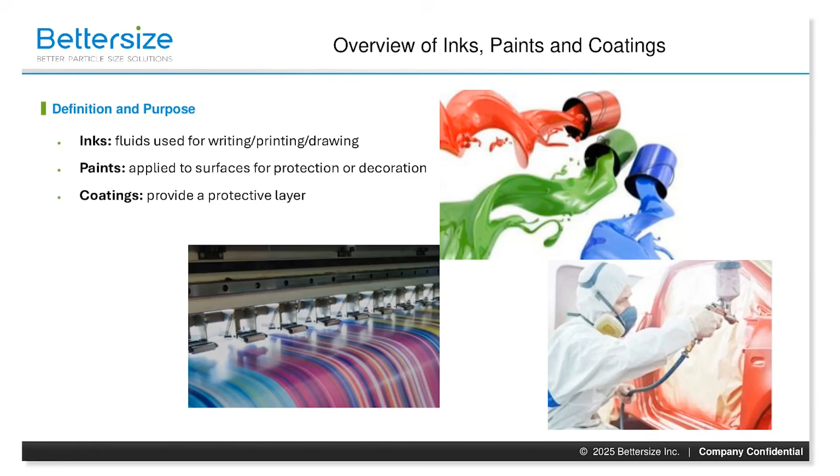And coatings are similar to paints, but are often designed for specific functional purposes beyond just appearance. They can provide protective, decorative, or functional properties to a surface, and are comprised of pigments, binders, solvents, additives, and fillers. These can include varnishes, lacquers, enamels, and other specialized formulations in industries such as automotive, aerospace, and construction.

So what do inks, paints, and coatings all have in common? They share the primary purpose of imparting color, protection, and specific functional properties to surfaces. They are comprised of similar fundamental components. Functionally, these materials rely on the effective dispersion of pigments to achieve uniform color and performance, and they often require stability to prevent settling, agglomeration, and other issues.

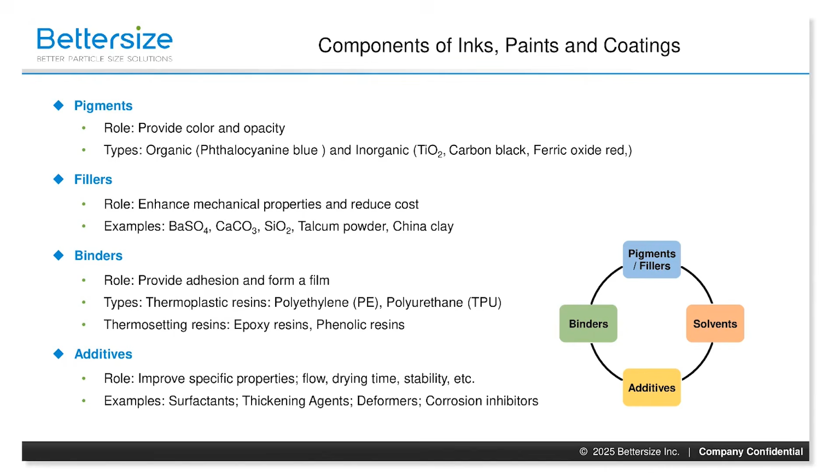Pigment is a material that exhibits a specific color because it selectively absorbs certain wavelengths of light. While many materials possess this property, pigments are stable at normal temperatures and have a high tinting strength, so only a small amount of it is needed to see the color when it's used on objects or mixed with a carrier. Many of the critical properties of inks, paints, and coatings, such as their color strength, covering ability, surface finish, and durability, are determined by the sizes and shapes of the dispersed pigment particles.

So let's quickly review some definitions. What's a particle? A particle is a small unit of matter with defined physical properties such as mass, volume, and shape. Particles can widely vary in size and composition, ranging from subatomic particles like electrons and protons to larger particles like grains of sand.

In the context of materials like inks, paints, and coatings, particles typically refer to the smaller solid components, such as pigments and fillers, that are dispersed within a liquid or solid medium to impart specific properties to the final product. And typical materials would include things like carbon black, titanium dioxide, organic and inorganic pigments.

Now that we've defined what a particle is, here are some key particle parameters to consider. Particle size refers to a single value representing the measurement of the size of the diameter of an individual particle, while particle size distribution describes the proportion of particles of different sizes within a sample, not just the size of a single particle. This is often shown as a graphical representation. It provides information about the range, the ratio, and the distribution pattern of particle sizes across the sample.

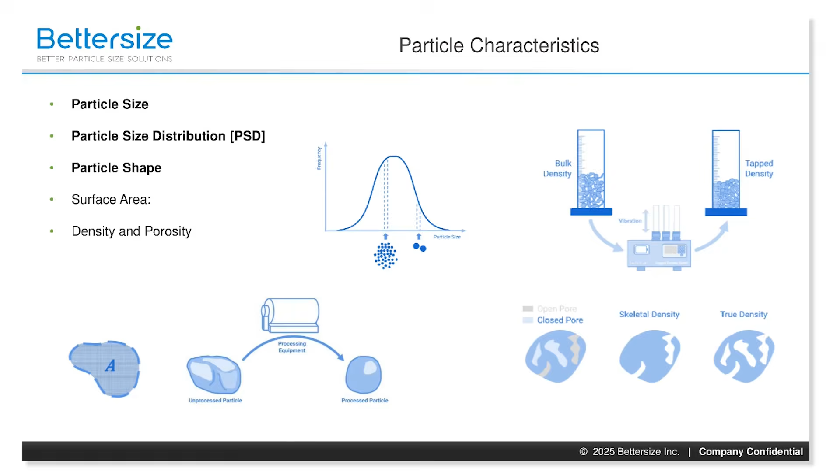I want to focus on particle size and the corresponding particle size distribution and particle shape, and their role in influencing pigment dispersion. Smaller particles are better dispersed and able to disperse more uniformly. And this can lead to even coverage. Irregularly shaped particles have larger surface area, which can enhance dispersion and stability. However, this can also lead to increased viscosity and potential settling.

If we move on to particle size influence on hiding power, opacity equals hiding power. So basically, it's covering ability. Smaller particles have a larger surface area to volume ratio, as I've mentioned, and this allows them to scatter light more effectively. This increased scattering enhances the hiding power of the coating, making it more effective at covering the surface. Particle size distribution: with a well optimized distribution, you can get a mix of larger and smaller particles, and this can improve hiding power by maximizing light scatter and filling gaps in the coating.

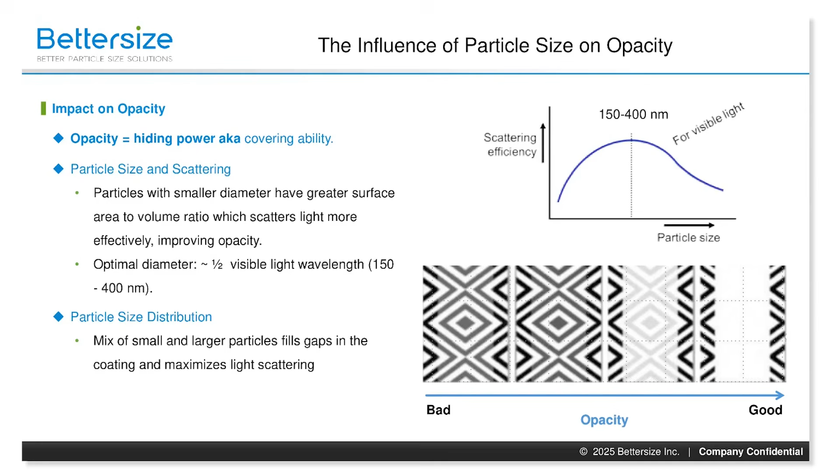So, in summary, smaller particles generally enhance the hiding power of the coatings by scattering more light more effectively, while larger particles contribute less to the opacity. But optimizing the particle size distribution is key to achieving the desired level of hiding power within these materials of inks, paints, and coatings.

Moving on to the size and shape effects on the optical properties. Two phenomena govern both hiding power and the color strength of inks, paints, and coatings: light absorption and light scattering of the pigment particles that are within the material. Color strength refers to the intensity of color a pigment can impart to a material, which is directly related to the size of its particles.

Well-dispersed fine particles provide better color consistency and hiding power, resulting in vibrant color appearance, compared to larger, poorly dispersed particles, which tend to scatter light less effectively, resulting in a weaker color strength, leading to a more muted or dull appearance. Particle shape: spherical particles can provide a smooth and uniform dispersion, which helps in achieving consistent color strength. Irregular shaped particles can scatter light in multiple directions, which can actually enhance the color strength.

So, an ideal distribution is a well-balanced distribution of particle size and shapes, which can enhance color strength by maximizing light absorption and scattering and result in more vibrant and intense colors. Particle size analyzers like laser diffraction can be used to measure the particle size distribution of a pigment, which can then be correlated to its color strength.

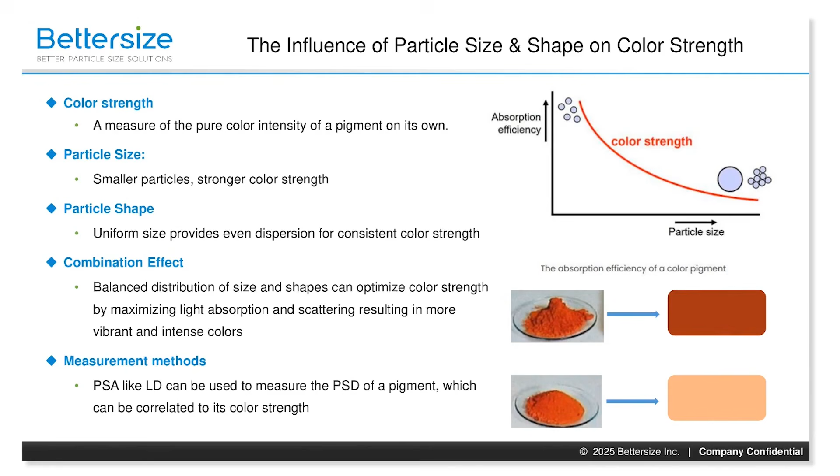Particle size and shape impact other characteristics of these materials. There's viscosity, where smaller particles and their higher surface area increase the viscosity of the formulation, which affects the ease of application and leveling. However, irregular shapes can increase interactions with the surrounding fluid, and this can also lead to higher viscosity.

In terms of mechanical properties, smaller particles enhance smoothness and durability. However, irregular shapes can improve mechanical interlocking, enhancing properties like adhesion and scratch resistance. In terms of durability, smaller particles fill voids effectively, creating denser and more durable materials. But irregular shapes can enhance wear resistance and withstand mechanical stresses.

And in terms of weathering, smaller particles provide better coverage and protection against environmental factors. However, irregular shapes can enhance protection against moisture and UV radiation. In summary, both particle size and shape are critical factors that influence the dispersion, stability, hiding power, mechanical properties, and final appearance of inks, paints, and coatings. Proper optimization of these factors is essential for achieving high performance formulations.

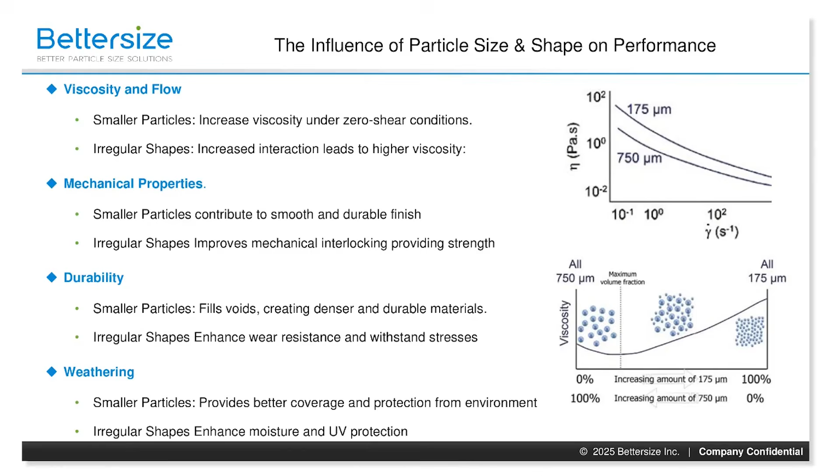So next, I want to discuss the importance of stability and zeta potential. And of course, what is zeta potential? Zeta potential is not a property of the particle, but of the system, comprised of the particle and the dispersion medium. Zeta potential is a measure of the electrical potential at the slipping plane of the particle in the medium. It indicates the degree of electrostatic repulsion or attraction between the particles.

High zeta potential means strong repulsion between particles, like common magnetic poles, which helps prevent agglomeration and ensures stable dispersion. It's a critical parameter for understanding and controlling the stability of colloidal suspensions, such as those found in inks, paints, and coatings. There are many factors that affect zeta potential, including pH of the suspension, the ionic strength of the solution, the type of electrolyte ions, the temperature, which can affect the viscosity and dielectric constant of the medium, as well as the diffusion and mobility of the ions in the suspension.

Particle concentration can lead to particle-particle interactions, which can affect the overall zeta potential. Presence of surfactants, polymers, solvent properties, and surface modification of the particle with coating or functionalization can alter the surface charge and thus the zeta potential.

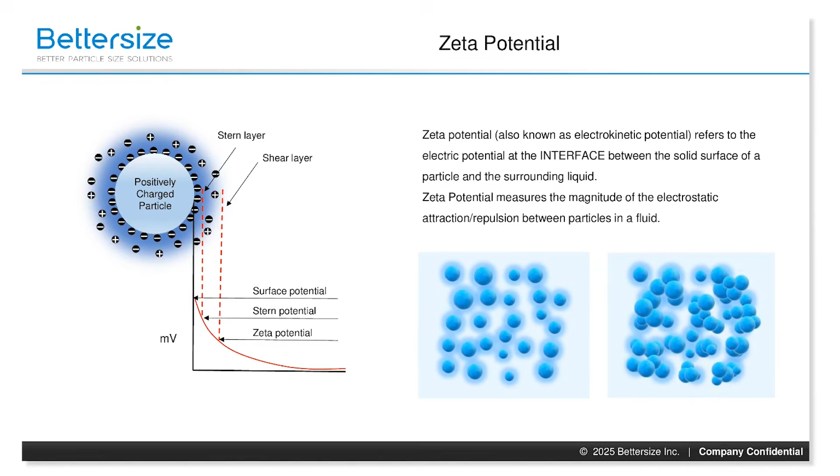So what is the importance of zeta potential? Having high zeta potential controls particle stability. High zeta potential, either positive or negative, creates strong electrostatic repulsion between the particles. This repulsion avoids clumping and aggregation and prevents particles from coming together, forming a stable suspension. Maintaining the high zeta potential ensures that particles remain evenly dispersed in the medium, preventing them from settling. It maintains that uniformity.

Electrostatic stability involves maintaining the forces that keep the particles apart, and this will prevent them from settling at the bottom of the container. By adjusting pH and conductivity, manufacturers can achieve the optimal zeta potential for stable dispersions. Dispersing agents such as surfactants and stabilizers can be added to formulations to improve the electrostatic or steric repulsion between the forces, and this further enhances stability and prevents aggregation.

Ensuring consistent and reliable formulations is dependent upon preventing settling, agglomeration, and flocculation. So manufacturers can ensure that they don't settle, aggregate, or flocculate, and maintain the properties throughout storage and application. Proper control of zeta potential and stability ensures that each batch of product has the same uniformity, performance, and quality, minimizing variations and defects.

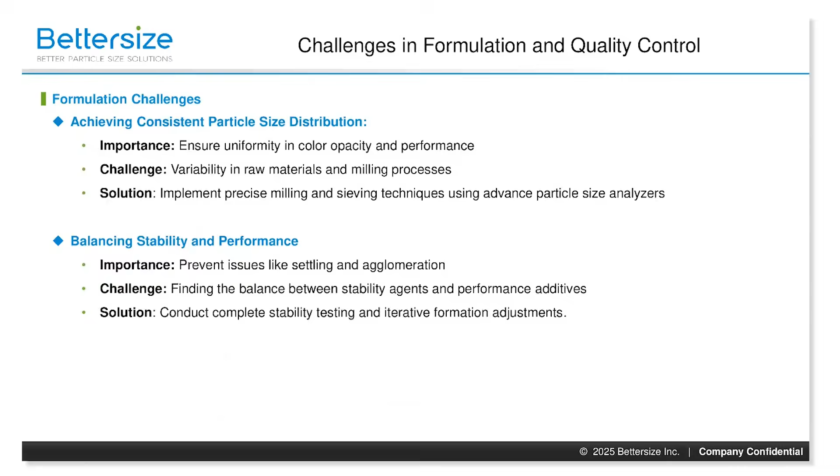In terms of processing issues, the goal is to prevent sedimentation and caking. This will ensure long shelf life and uniform application. Because the challenge is that particles can settle over time, leading to a separation of the components. And high viscosity formulations may be prone to caking, forming hard lumps, and are difficult to redisperse. So solutions include using thickeners and stabilizers to maintain the suspension and prevent sedimentation. Controlling viscosity ensures a smooth flowing consistency, and optimizing storage conditions such as temperature and humidity reduces the risk of caking.

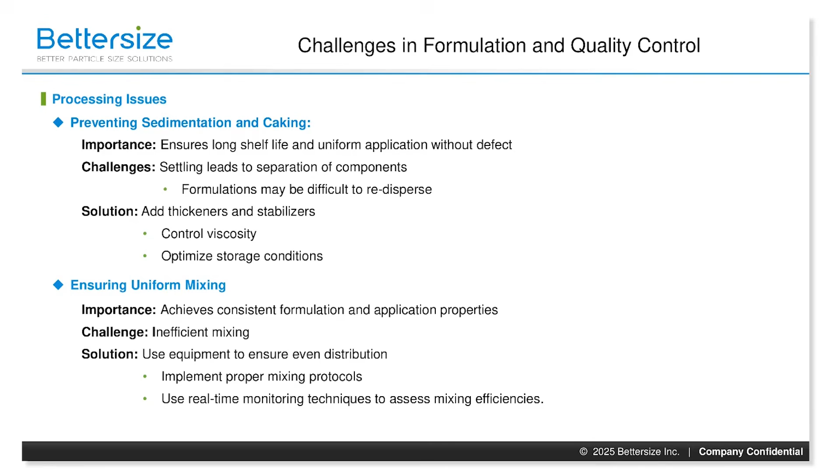Another processing challenge is to ensure uniform mixing. It's important that we achieve consistent formulation and application properties to know that all components are evenly distributed. Inefficient mixing can lead to uneven distribution of the pigments, binders, and additives, and this will affect color and performance. This is especially important in large batches, as this may present difficulties in achieving thorough mixing. Solutions include mechanical mixers to break up the clumps and ensure even distribution. Using real-time monitoring techniques to assess mixing efficiency is important, and you can adjust the parameters as needed.

In terms of quality control, the goal here is to maintain batch-to-batch consistency to ensure product reliability and customer satisfaction. Challenges, of course, arise from the variability in raw materials and process conditions, which can lead to differences in color, viscosity, and performance. Solutions include implementing strict quality control measures, including incoming raw material inspection and testing, developing and adhering to SOPs for production processes, and performing regular calibration and maintenance of equipment to ensure accuracy and reliability.

If we address environmental factors in order to maintain product performance under varying conditions, which include temperature, humidity, and exposure to light. The environmental factors can cause degradation of pigments, binders, and additives, which leads to changes in color, stability, and performance. Solutions include conducting environmental testing to assess the impact of these different conditions on the product stability and performance, and as a result, using robust formulation additives that are resistant to these environmental factors, and optimizing packaging to protect the products from external influences.

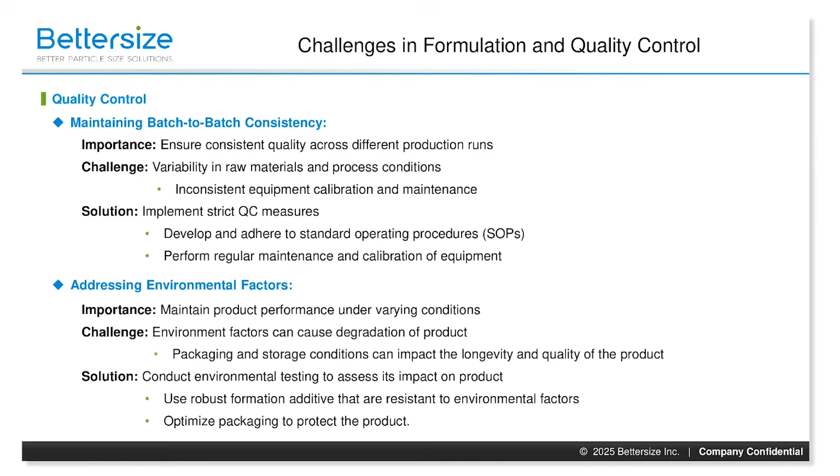A solution to address the challenges in formulations and in quality control is to employ advanced characterization techniques. This provides detailed insights into particle properties and formulation performance, enabling precise control and optimization. Examples include laser diffraction, which measures particle size distribution, ensuring uniformity and consistency. Dynamic light scattering analyzes particle size and distribution in colloidal systems. Zeta potential measurement assesses the electrostatic stability of particles, preventing aggregation.

Rheology analysis evaluates the flow behavior of formulations, optimizing viscosity and application properties. Electron microscopy provides information on particle size, morphology, and surface topography. Static multiple light scattering characterizes the stability of dispersions. Image analysis provides particle size, shape, and distribution information. And BET, Brunauer, Emmett, Teller, provides information about the particle size and porosity of a material.

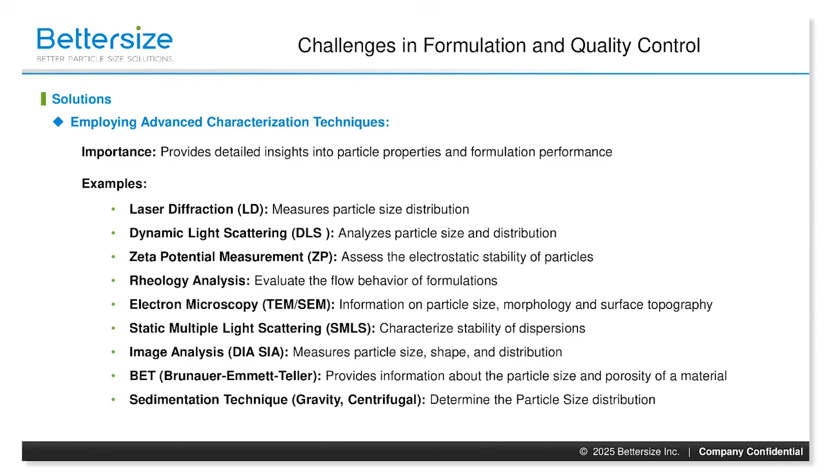Solutions to common challenges include optimizing formulation parameters. The importance of this is that it enhances product performance and consistency by fine-tuning the composition and processing conditions. One example would be to adjust the pH, which as we have mentioned ensures optimal zeta potential and resulting stability. And this prevents issues like agglomeration and sedimentation. Selecting the appropriate stabilizers can enhance the dispersion and prevent aggregation.

And fine-tuning the additive concentrations will balance performance and stability without compromising either aspect. So ensuring the right balance of these additives to achieve desired properties will add to the durability, gloss, and adhesion of these materials.

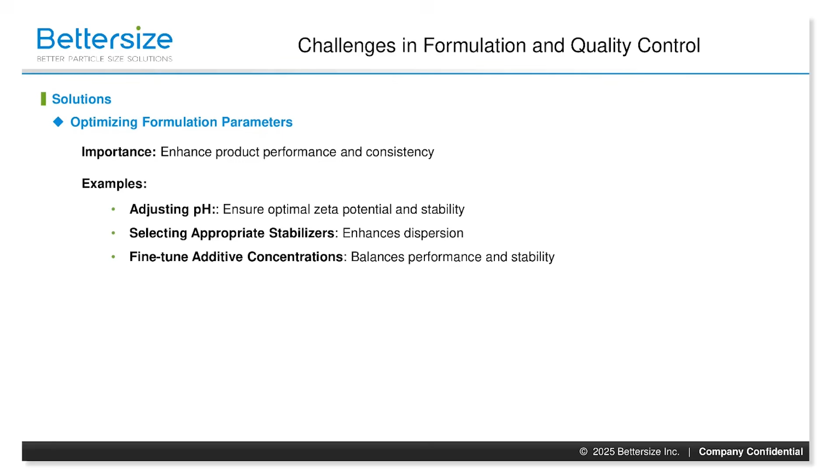So as we wrap up part one, let's highlight the critical aspects that impact the performance and quality of inks, paints, and coatings: the importance of particle size and shape, the role of zeta potential and stability, and the common challenges and solutions in formulation and quality control. And I hope that I've helped you understand the whys of the importance of particle characterization, and how to enhance and improve these products through particle analysis. Now I'll hand this over to my partner, Weichen, to explain how you can use particle size distribution, zeta potential, and stability analysis with some interesting case studies in part two of this presentation.

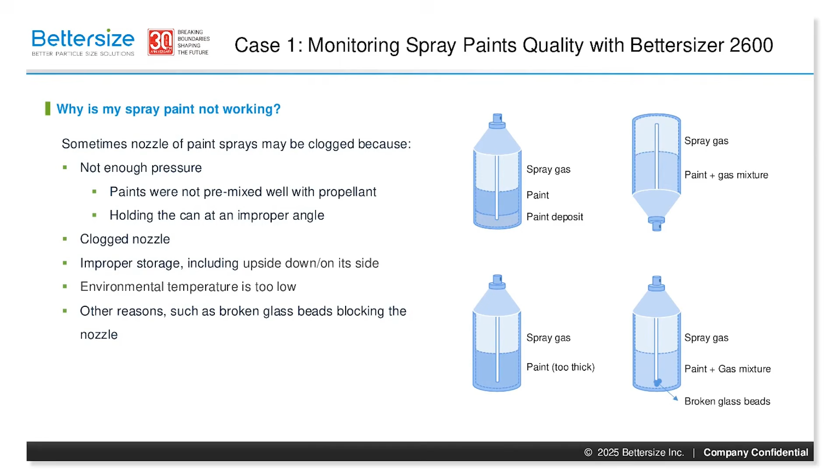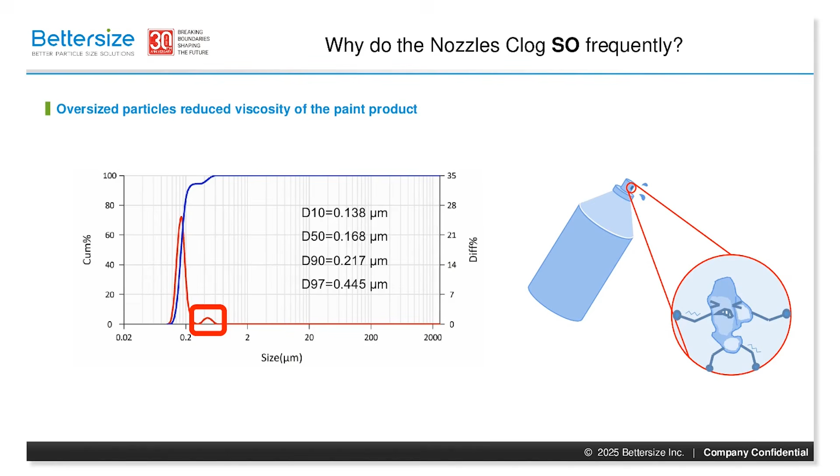The animation on the right shows how agglomerates clog nozzles, leading to spray paint failure. The Bettersizer 2600 helped this paint provider identify and quantify these oversized particles, allowing them to adjust their process and solve the problem with an optimized grinding setup and finer filtration.

Now, let's talk about the Bettersizer 2600 laser diffraction particle size analyzer itself. Its tagline, "Better particle sizing for every need," really sums it up. This award-winning instrument, recognized with the 2024 i-NOVO Award, offers unparalleled measurement capabilities with its modular design, from paint suspensions to pigment dry powders. With its unique optical design, the Bettersizer 2600 boasts an exceptionally wide particle size range, handling everything from 0.02 to 2,600 microns with wet dispersion and 0.1 to 2,600 microns with dry dispersion.

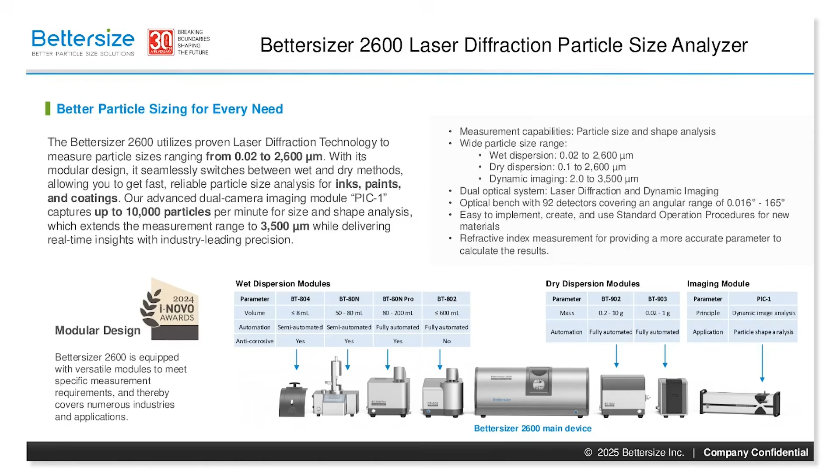Beyond size, the Bettersizer 2600 also measures particle shape, another crucial factor, thanks to the powerful image analysis module. For even larger particles, its dynamic imaging capability covers 2 to 3,500 microns. This versatility is achieved through its unique combination of laser diffraction for rapid size analysis and dynamic imaging for detailed shape information.

As a summary, let's talk about how we can measure particle size to optimize quality inspection. Traditional methods like sieving and filtering have long been an important part of paint production processes. Sieving physically separates particles, which is essential. However, it presents some challenges, especially when dealing with fine particles around 40 microns and below, due to issues like mesh size limitations and particle agglomeration. It can be difficult to handle these fine materials effectively, and the resolution and accuracy of sieving can be limited. While sieving provides a systematic and reliable process, the results themselves can lack the precision needed for modern formulations.

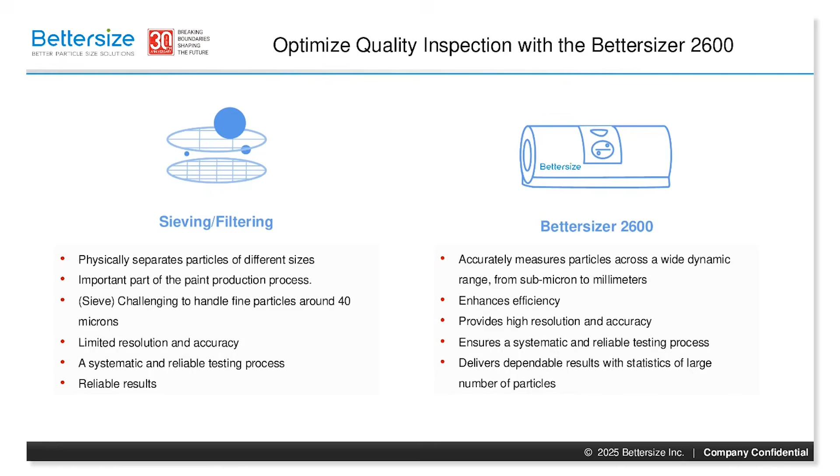That's where the Bettersizer 2600 comes in. This advanced particle size analyzer allows us to precisely measure and control particle size distribution, ensuring consistent spray paint quality and minimizing those frustrating issues. Like sieving, it ensures a systematic and reliable testing process. But unlike sieving, it delivers dependable results with detailed statistics from a large number of particles. This allows for more precise quality control and optimization of your paint formulations.

We have seen how the Bettersizer 2600 revolutionizes particle size analysis in spray paints. Let's move on to our second case study, evaluating ink quality with a zeta potential test of the BeNano series. Our second case study focuses on inks and the critical role of zeta potential. As the subtitle suggests, we are investigating nano-sized pigment dispersibility and stability in inks, a core challenge in ink formulation.

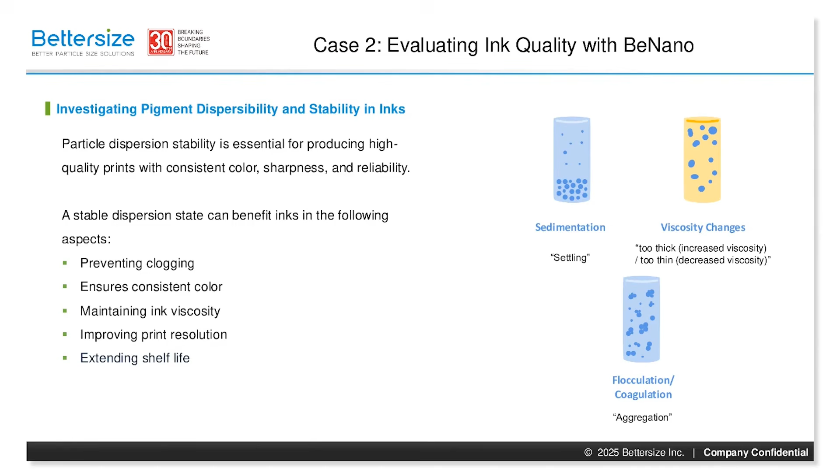A stable dispersion brings several key benefits. It prevents clogging, ensures consistent color output, maintains the correct ink viscosity, improves print resolution, and even extends shelf life. This image on our right illustrates some common consequences of unstable dispersions: sedimentation, viscosity changes, and flocculation. In the following discussion, we will see how the BeNano instrument helps us understand suspension stability to achieve optimal ink performance.

Understanding suspension stability hinges on zeta potential. As mentioned by my colleague Dr. Barnum, the image on the right explains what zeta potential is: the electrokinetic potential at the outer layer of a particle. The zeta potential affects the concentration of charges around the particle, thus affecting the charge stabilization effect. This chart on the left, based on empirical observations, demonstrates the direct impact of zeta potential on suspension stability. As the absolute value of zeta potential increases, the suspension system becomes more stable due to charge stabilization. However, please note that the values listed here serve as general guidelines, not absolute thresholds.

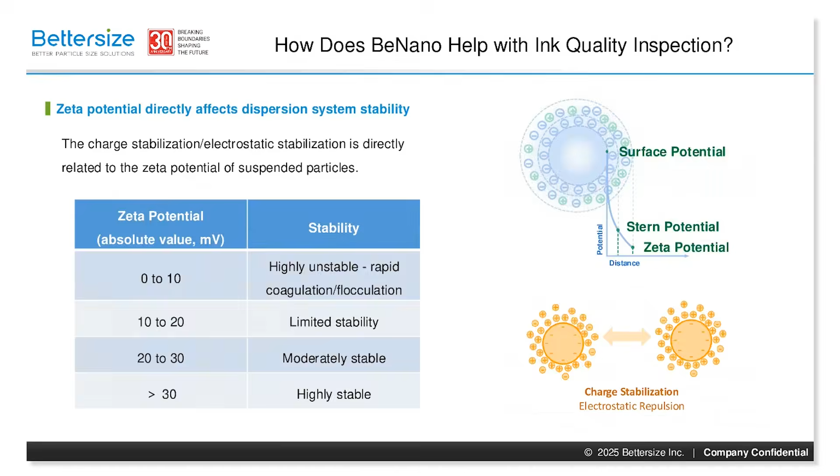The BeNano provides reliable zeta potential analysis, crucial for keeping pigments stably dispersed in inks. Here, we have a phase plot on the upper right and corresponding results down here from a nanopigment ink sample. This sample is a complex mix of nano-sized pigments. The measured zeta potential of around 30 millivolts shows BeNano's precision even with complex ink formulations.

Knowing the zeta potential lets us make targeted adjustments for ink stability. We can make the adjustment in several ways. For example, in water-based inks, we can change the environment's pH by adding acids or bases, which alters the surface charge of the pigment particles. Or we can also change the ionic strength by adding salts. This affects the double layer around the particles.

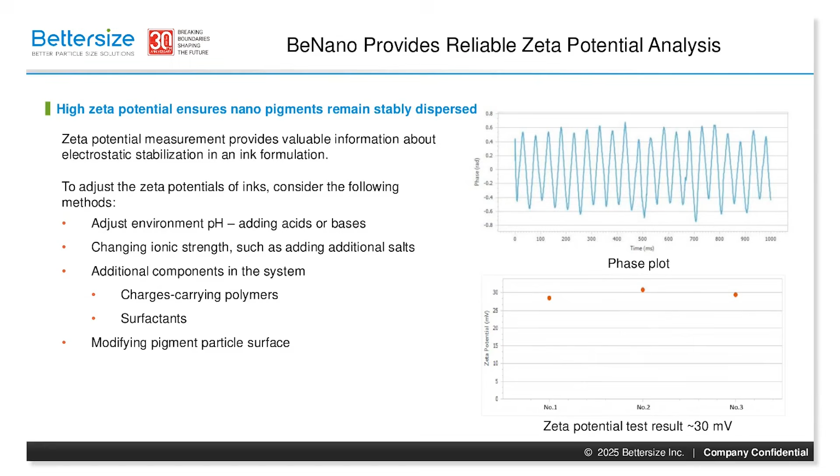Here is the star of our show for ink analysis, the BeNano nanoparticle size and zeta potential analyzer, striving to be the nanoparticle expert you need. This powerful instrument is designed for precision and versatility. For the zeta potential measurement we have discussed, even samples with low electrophoretic mobility, which can be particularly challenging, are no problem, thanks to its PALS technology.

For comprehensive zeta potential analysis across a wide pH range, the BAT-1 auto-titrator is seamlessly integrated. It also measures the size of nano-sized samples down to an incredible 0.3 nanometers, covering a wide range of particle sizes. Its wide concentration range, up to 40%, is made possible by its DLS backscattering technology.

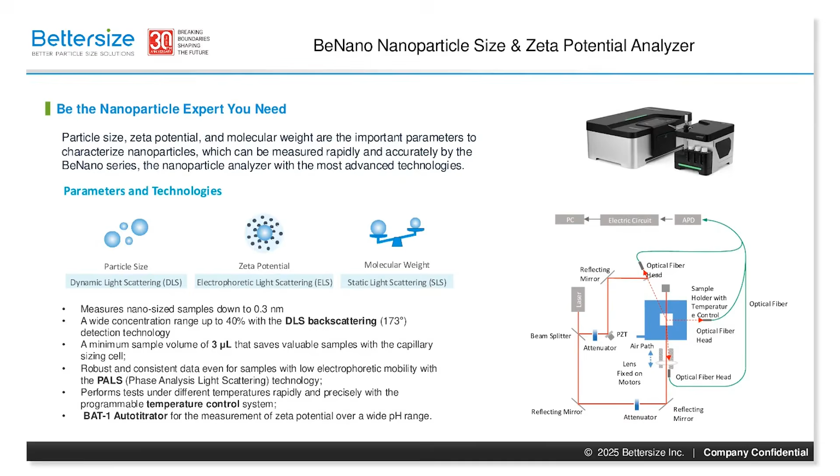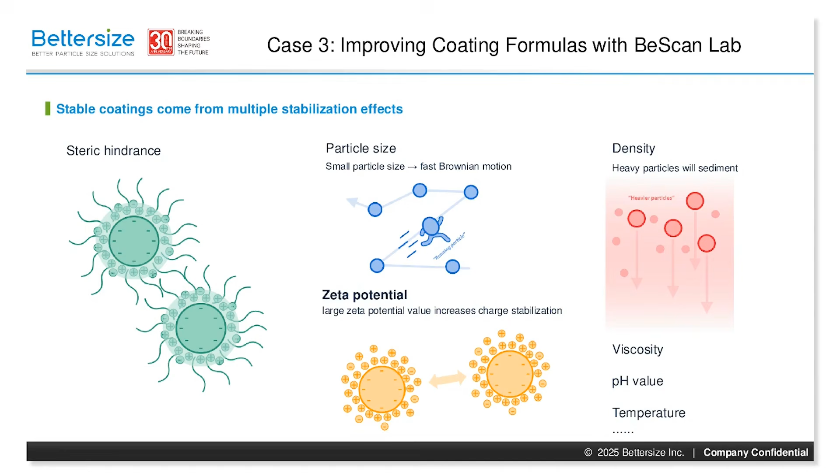Finally, let's turn our attention to our third and final case study, analyzing the stability of coatings. Just like Dr. Barnum mentioned in the first part, stable dispersion systems rely on a combination of factors, not just one. We have already discussed the crucial role of zeta potential in the last case, but other key factors come into play. These include steric hindrance, particle size, density, viscosity, pH range, and temperature. A truly stable coating requires careful optimization of all these interacting parameters.

Usually, an SMLS instrument provides both transmitted and backscattered optical signal data. Because coatings are typically opaque, transmitted light signals are often weak, making backscattered light a more reliable indicator of changes within the sample. Therefore, backscattered light is preferred for the SMLS analysis of coatings.

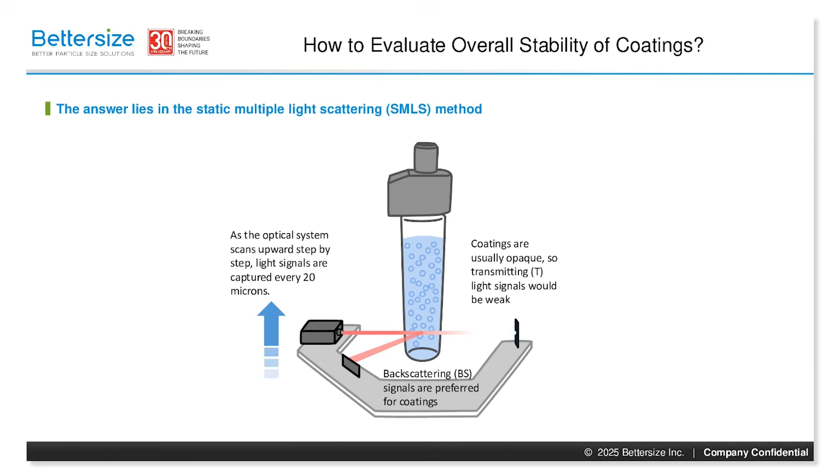The signal collected by the SMLS instrument is recorded in two forms: raw data and delta data. Raw data represents the original unprocessed signal detected by the forward or backward detectors. It's the baseline we use for comparison. The delta data, on the other hand, tells us about change. It's calculated by differencing subsequent scans from a reference scan, which is typically the very first scan. The delta data provides a quantitative method to understand how the sample structure evolves over time.

But how do we quantify stability? We use the instability index. The instability index is calculated by accumulating the differences between a successive scan and a previous scan. These differences are then mathematically combined into a single value that represents the stability for the whole sample at one corresponding scan. If one scan has a lower IUS value, say 0.5, it indicates that at this moment the system is in a stable status. On the contrary, if the IUS value is larger than 10, you may be witnessing an obviously unstable phenomenon like sedimentation, flocculation, or delamination.

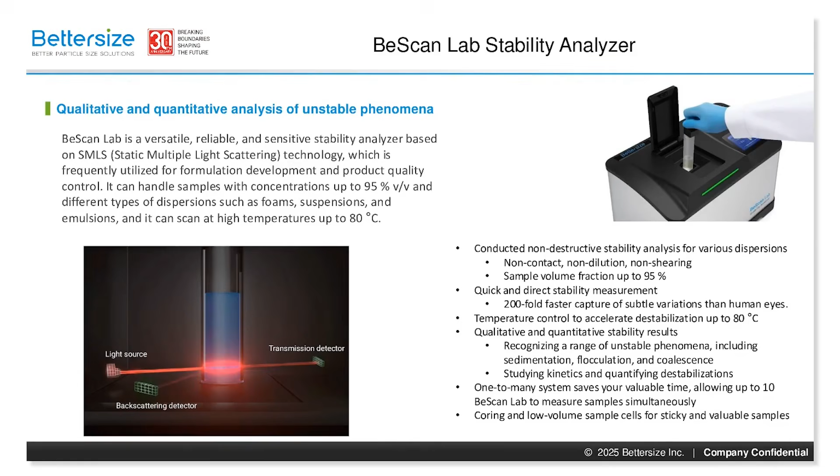To summarize our exploration of particle characterization, let's consider how to choose the right tool for the job. Both electrophoretic light scattering, ELS, and static multiple light scattering, SMLS, offer valuable insights, but they are best suited for different applications. Choose SMLS when you need a comprehensive evaluation of stability, including both qualitative and quantitative analysis. It is also worth noting that SMLS provides a quantitative view of stability dynamics, revealing how quickly a system changes over time and providing insights for optimizing formulations and ensuring product quality.

SMLS is ideal when you have sufficient sample volume, typically 4 to 25 milliliters, and when dealing with high viscosity and highly concentrated samples. On the other hand, ELS is the preferred choice when you focus on electrostatic stabilization. It's perfect for rapid stability evaluations, often requiring less than a minute. ELS is also essential when working with limited sample sizes, as it only needs 0.75 to 1.5 milliliters.

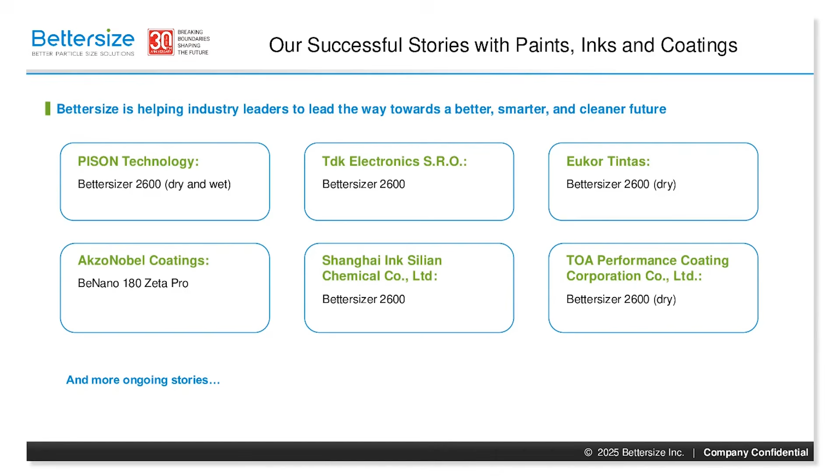Let's recap what we have covered today. We began by understanding the critical role of particle size in spray paint quality and how the Bettersizer 2600 helps manufacturers identify and control oversized particles to prevent nozzle clogging, thus ensuring consistent product. We then explored the importance of zeta potential in ink stability and how the BeNano instrument helps control this crucial parameter, leading to optimized ink formulation with superior color consistency and shelf life.

Finally, we delved into the world of coating stability, demonstrating how static multiple light scattering and the BeScan Lab analyzer provide both qualitative and quantitative insights into destabilization mechanisms, allowing for rapid and effective coating formulation development. From optimizing particle size in spray paints to ensuring ink stability and analyzing complex coatings, Bettersize offers a comprehensive suite of solutions for particle characterization.